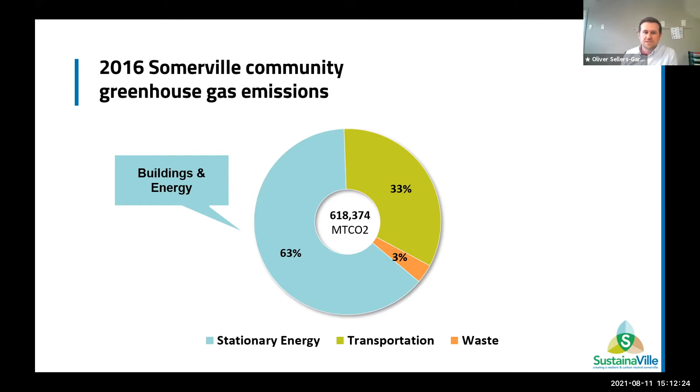Our climate action plan, Somerville Climate Forward, which we completed at the end of 2018, is a really broad-reaching plan. It covers greenhouse gas reductions, resilience, and equity. But reflecting what an important part of our carbon footprint buildings are, four of our 13 strategies are directly related to reducing that stationary energy part of the pie.

As you'll see in our plan, we really look at new construction and existing buildings quite differently, as makes sense. For a lot of this, we think the best strategy is to consider what's going on at the state level versus what we can do internal to our community. So we really prioritize working for state level changes so that new construction across the state will be net zero. The actions there were for us to play more of an advocacy role, and we've partnered and collaborated with many of the people on this call.

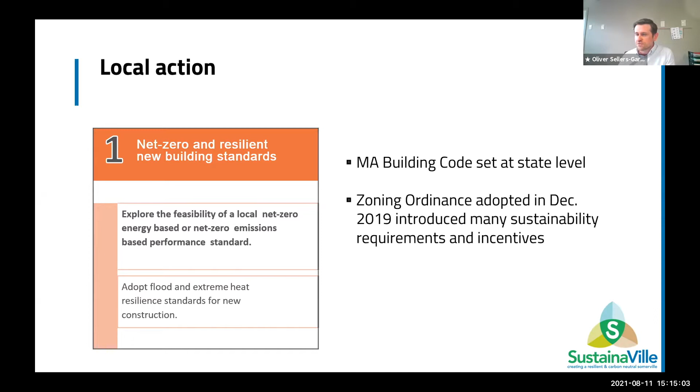On a more internal-to-our-community level, we had a goal to explore the feasibility of a net zero code, or something like a standard for our buildings, understanding that the building code is set at the state level and our hands are really tied. That work has taken a winding path and more quickly found traction in looking at what we can do within our zoning authority to do something like a standard.

I don't have to explain this to you, but I'm going to anyway—just to remind everyone that zoning is not a great tool to change everything about new construction. We really can't restrict materials or set any sort of energy standards. These are all things we're familiar with. Those of us advocating for action at the state level are kind of left with the Swiss cheese of all the big things that might really matter.

So, as a big oversimplification, what this means is that in zoning we're really left using incentives to get the high level of building performance we're looking for. What we're really looking at are some requirements that have not been questioned much from a legal precedent standpoint in terms of standards, but the majority of what we're able to do is with incentives, because we're not actually requiring anything that takes the place of or supersedes the building and energy codes.

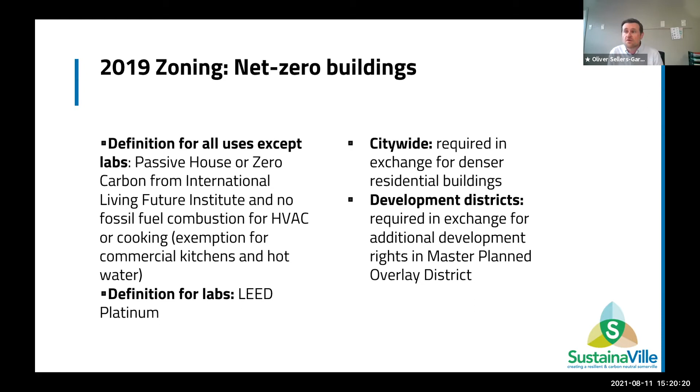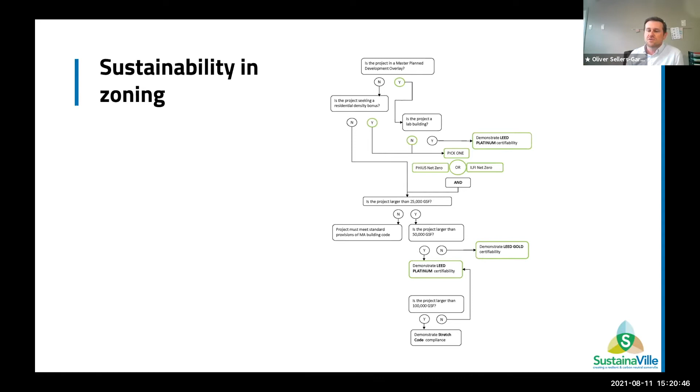This slide is hard to read. I put it in here for posterity because everyone asks, can we have a copy of the slides? I figured this is something good for you to look at when you have the copy of the slides on your desktop. This is a flow chart to understand basically where your building would fall in terms of having to meet some of these requirements or take advantage of some of the bonuses.

So to comply, there are lots of different things that you have to do, but related to the zoning I mentioned, typically what this looks like is submitting a LEED checklist and a narrative. We also have a questionnaire that we ask energy and resiliency questions about, which is both to collect information, but really to prompt thinking. And then also recently we're piloting the use of a low load building calculator that gives everyone the energy information we're actually looking for, which is to understand how your proposed building is actually performing compared to a code building or a much more high performing building.

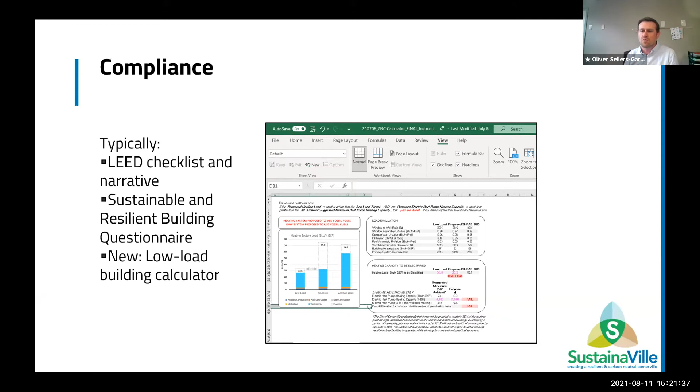So I'm just going to close here by reflecting a little bit on where this came from and where we're going now. The intention of having multiple pathways, which is really the discussion for today, is giving lots of different choices, but there are some nuances.

With Passive House, we saw an ever greater uptick in use and awareness, and really good precedents in the residential sector, particularly affordable housing. For zero carbon, we were really interested in seeing embodied carbon as part of the standard. And also we wanted to use our position to try to introduce a new standard into the region for its use.

These numbers are already a little outdated, but in the year and a half that this zoning has been in effect, we've seen close to 200 Passive House units go into the permitting pipeline. Over 20% of that is affordable housing, and that's not just because of the affordable housing minimum that's required, but also because we're seeing all affordable Passive House buildings being proposed.

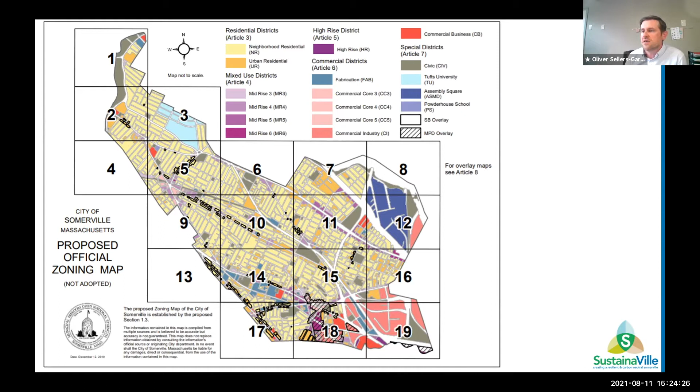I do have an extra slide that I kept in case there was a question, but now I'm realizing it might be helpful for you to see, since you all know Somerville, moving around Somerville, this will give you an idea of what is available for net zero development, and that's an enormous portion of the city. The black hashed area is where you could basically build unlimited height net zero buildings, and that really tracks well with our development areas and new transit. Residential is a large swath of the city.

So I see that some questions have popped up. I'm going to defer to Jim if you think there's any urgent ones to answer now, or if we can do it later and I can pass off to Aaron.

Let's answer these two about certifiable real quick, because I think that's easy and you probably have it. So both for LEED, it's LEED certifiable as opposed to certified.

But is that the same for the zero carbon and passive house, or are you expected to go through the certification in order to get the density bonus, which is sort of backwards because you get it first, but whatever. For LEED, it is certifiable. And I believe for passive house, which is what I'm more familiar with—we haven't seen any for zero carbon—but I think you can't really move forward without actually registering your project and essentially going for the certification. So it kind of de facto becomes that you do become certified.

Yeah, that sort of makes sense. And I can say that's been our experience working on projects in Somerville.

And then I guess Galen had a quick question about whether the density bonus is applicable only to new construction, or does it include large scale renovation? This is all new construction, and one of the reasons why zoning is such an imperfect tool is that it really only touches new construction or major renovation.

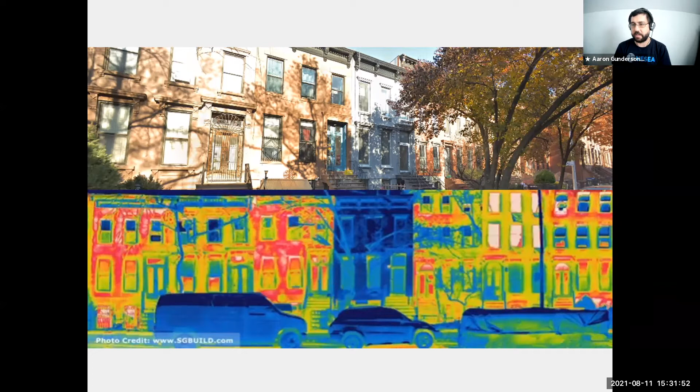And in addition to new buildings, we also see existing buildings being renovated to become passive house. So this is the image of row houses in Brooklyn, and one of those was renovated to be a passive house. Still hard to tell right now, but throw up the thermal image and it makes it a little easier to see. That one in the center that's blue, that's the renovated passive house. Basically it's throwing a blanket over it, trapping all the heat in. The buildings next to it with the red, yellow, green coloring on the thermal image, that's heat escaping. It's staying in the passive house.

What you achieve by doing this is a reduction in overall energy use, of course, but you also see a reduction in the associated carbon emissions, which is really the reason we're doing this to begin with. But beyond those big focuses, energy and carbon, we also see improvement in air quality, health of the building, and occupant comfort inside of it.

So lower instances of particulate matter and VOCs and other pollutants inside the building, better rates of ventilation, so air exchange. You also see healthier living spaces, more comfortable and consistent room temperatures. So say the room temperatures are varying from room to room, or from next to the window to next to the door, it's much more consistent. You don't have the air drafts coming in.

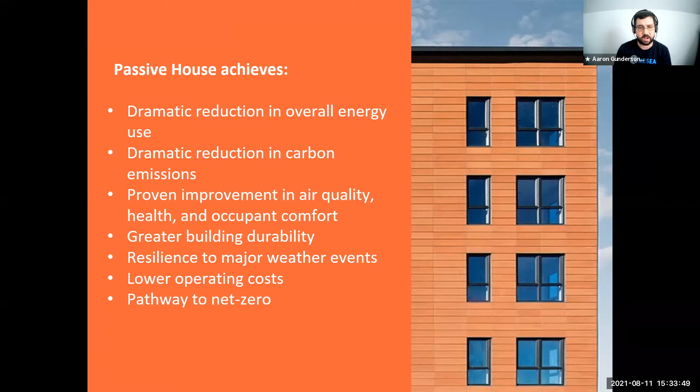We also see lower operating costs, of course, and then a pathway to net zero, which I'll talk a bit more about here in a moment. So what do I mean by energy reduction? What we achieve is a 90% or greater reduction in heating and cooling loads.

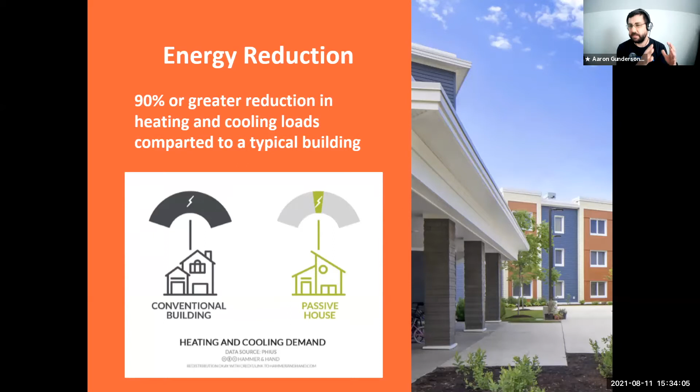And this isn't just a goal. Passive house is, as I mentioned, a performance standard, so you have to hit these numbers. So 90% or greater reduction compared to a typical building is what you can expect from passive house for space conditioning. In terms of overall energy use, it varies, but we definitely see a pretty consistent maybe 60 to 70% reduction in overall energy use from a typical project.

A graph here is just showing you a comparison of Massachusetts projects. This is EUI, or kBTUs per square foot of energy use in the building. The left bar is showing you buildings built to the Massachusetts stretch code, and the one on the far right is showing you projects built to the PHIUS Plus 2015 standards, which is one of the more common passive house standards. You can ignore the middle one for now.

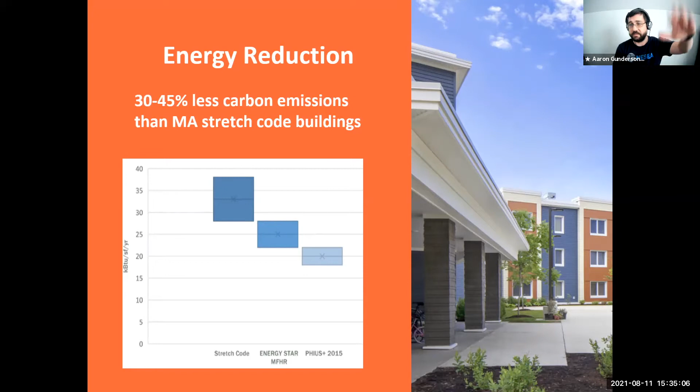But what you see is the variation. The stretch code buildings are up there around 38 EUI down to maybe 28 at the low end, whereas the PHIUS-built projects are right around 20 EUI. So a significant reduction from even stretch code buildings. If we were just looking at regular base code buildings, not the stretch code, it would be off this chart, maybe 55 or so.

So it gives you an idea of the type of energy reduction that we're seeing in these projects. As I mentioned, they're also a pathway to net zero. The passive house standard, sort of the core passive house standard, is not net zero. It doesn't require the project to be net zero. What it requires is that significant energy reduction. But because there is a significant energy reduction, many of these projects become net zero because they no longer require a large space for solar, they can now fit it on their roof.

Or in the case of the Bullitt Center here in Seattle that you're seeing, on kind of an extension of the roof. But that's one of the ways in which passive house is able to be this pathway to net zero, by reducing energy demand significantly. Hopefully you can add renewables and get it on site, or maybe on site and a small off-site somewhere else.

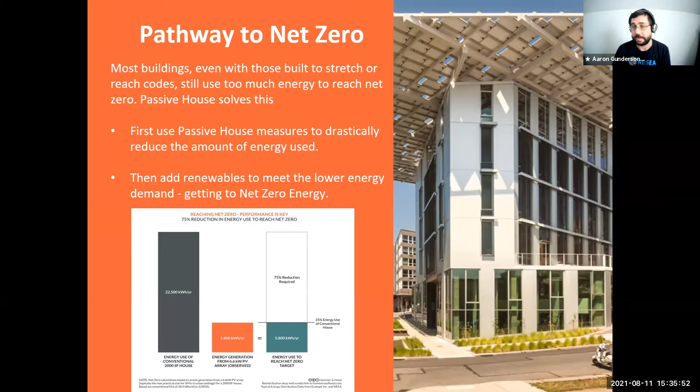Using some of the sunlight in the winter months for heat for the building, but then finding unique ways to block it out in the summer so you don't overheat the building. And then balanced ventilation and efficient mechanical systems.

Passive house buildings do have mechanical systems. They still use heating and cooling produced in the building, most commonly through air source heat pumps or efficient VRF systems in multifamily buildings. And then pretty much every project has some type of energy recovery ventilator or heat recovery ventilator. For larger projects, these are sometimes one per unit, or sometimes ducted to a group of units. That varies from project to project.

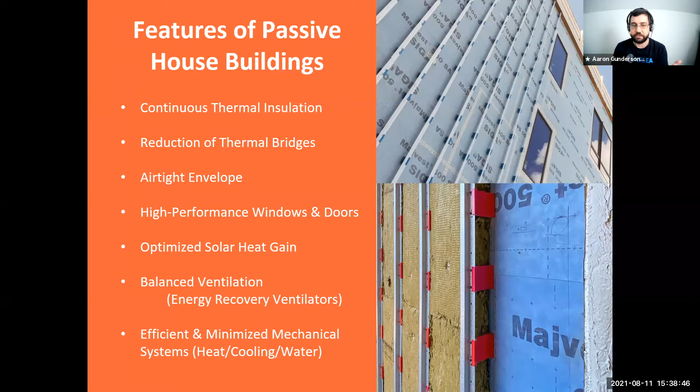So these are the type of details that become important with passive house projects and really separate them from your traditional buildings. Now, in terms of certification, what does this actually mean? What are we actually measuring? There's sort of two main categories: your performance criteria, and then your other criteria, sometimes called the soft criteria. The performance criteria are the main ones.

This is focused on the areas of heating and cooling demand—basically, how much energy is the building using for heating and how much energy is it using for cooling?

Then there's whole building air tightness. This is measured with a blower door test on site, so you're actually measuring the air tightness of the building. I'll talk a little bit about that metric in a moment.

And then the last one is your source energy demand. This is the overall energy use of the building itself, measured in source energy. So for those familiar with site energy versus source energy, we're talking about source energy—what actually has to be used at the power plant in terms of electricity.

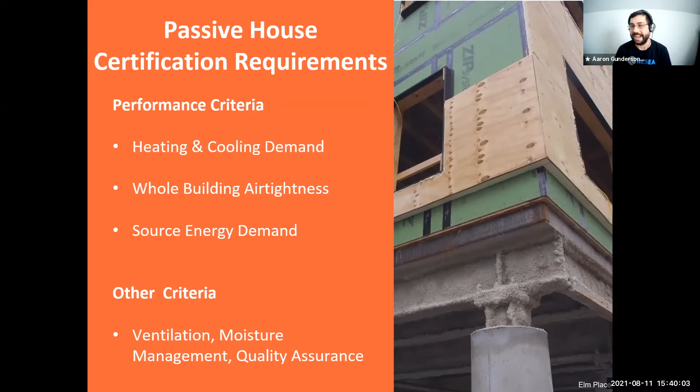Some things you're not seeing here: you're not seeing the requirement for it to be net zero, like I mentioned before. You also don't have a requirement for it to be all electric. We do see passive house buildings that become all electric, but it's not a requirement of the standard. In a lot of cases, some of these larger multifamily buildings might still have a gas line running in for water heating, for example—that's kind of a common use for that. We're starting to see the shift to electric water heaters, but it's been a slower shift than it has been to, say, electric heating systems.

There are two groups that create the Passive House standard: the Passive House Institute, or PHI, and the Passive House Institute US, or PHIUS. Both organizations exist, and both certify projects right here in Massachusetts and in the US. So don't let the names confuse you about Passive House Institute US versus non-US—they both exist and both certify projects. They create and manage the Passive House standard, defining the metrics and criteria, and provide the certification.

So when you enroll your project to become a Passive House, you pick one of these. You're not doing both - you're enrolling with either PHI or with PHIUS. You're going through their certain standard and meeting their criteria. We're not going to go into the actual criteria today, the numbers - they're very similar between them, but there are little differences. So you enroll with the specific one, and you generally work with a Passive House consultant or designer who's experienced with that specific program.

Both of them have multiple levels of certification - they have their basic level Passive House certification, and then they offer some improvements above that. PHIUS just rolled out their newest standards starting this year for 2021, which I think will become required starting next year. That includes PHIUS Core, which is what we've been talking about, the basic requirements to be a Passive House building. But they also introduced PHIUS Zero, a way to recognize projects that are becoming net zero. For the standards in Somerville and other municipalities that are putting Passive House into their zoning requirements, it's simply that core metric, that basic metric of becoming a Passive House building.

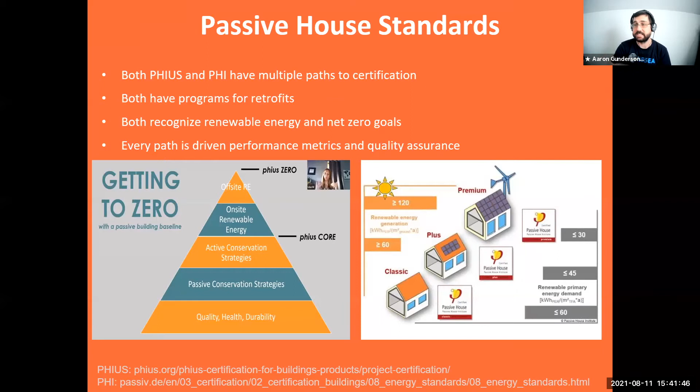So I mentioned air tightness - I want to come back to that. This is the one number I want to show because I think for most projects, especially the larger projects we're seeing, the ones that would trigger density bonuses in Somerville, air tightness becomes the most critical metric rather than the thermal performance and heating performance. Most projects through the design phase are really able to hit that through tweaking how they design the project. But the on-site construction is really where the air tightness is tested, and that's where it becomes important - all those details, making sure everything gets done right during construction, really determines if this is hit or not.

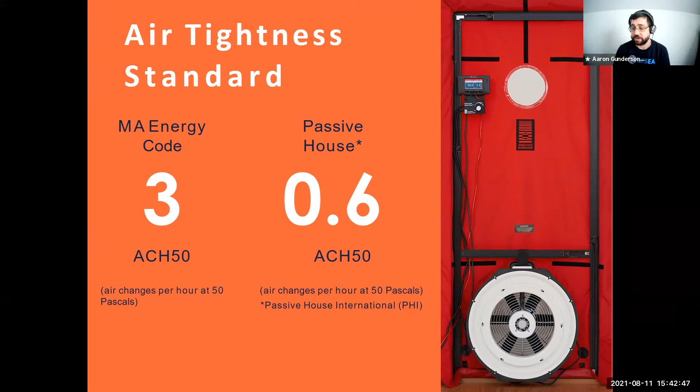So it's 0.6 air changes per hour at 50 pascals of pressure - that's just a fancy way of talking about the level of air tightness the project has to achieve. The current energy code in Massachusetts says 3, so you can see it's a pretty steep reduction, and why this is probably the big metric projects are focused on. But by doing proper detailing on site, making sure you have the quality assurance and quality control there, allows you to make sure that's successful.

So I want to talk a little bit about how Passive House fits into LEED, and I'll mention the Living Building Challenge as well. With LEED, there's a whole bunch of wide-ranging categories where you can get points. Passive House really helps you narrow in on a couple of those - obviously energy and atmosphere, which is a big part of LEED credits, Passive House really allows you to hit quite a few of those. But it can also help you hit some of the indoor environmental quality credits as well, because of that focus on ventilation and fresh air - you see some of those points being hit as well.

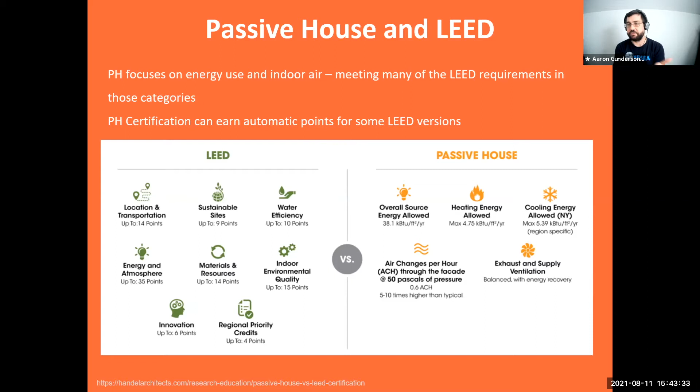So Passive House is really complementary to projects - if you're already familiar with getting a LEED Platinum building, when you look at those energy and atmosphere credits, for example, you're going to see Passive House really beat a lot of those.

The other big thing with Passive House, and where I think it's really important - I like the question that was brought up earlier - is that certification doesn't just have to be certifiable, certification is really important and it does have to be done. That's because what Passive House does is provide that third-party certification. This isn't just you as a designer, developer, or builder vouching for your project - this is actually a third party coming in and verifying that you have done the right energy modeling, that you built the project how you were supposed to build it, and testing it on site through blower door tests and other means, really making sure you hit the level of performance and quality that Passive House requires.

So, some examples. I really only have one to talk about—I mean, Somerville is why we're here today, but we've seen this happen in other places too, in different ways. On the policy front, passive house is really being addressed in a scattershot way. You're seeing different municipalities across the country, and around the world, incorporate this in different ways. A lot of cities in Europe have led the way. But like Somerville, they're trying to figure out how to address their own carbon emissions. Just like that graph Oliver showed, where they noticed buildings were a huge source of carbon emissions in Somerville, other cities are noticing the same thing and turning to passive house as a method to address that.

Vancouver was one of the first larger scale cities to do this, and they set aside zoning requirements that included specific low emission targets. They outlined both Passive House and ILFI, the Living Future Institute, as a way to meet that. This plan, the zero emissions plan, requires all new buildings to meet this by 2030, with some requirements for certain buildings by 2025. They also offer space bonuses for affordable projects. One unique thing they did, and what I'd like to see other cities with similar zoning requirements do, is train city building inspectors. The folks actually going out inspecting these projects were trained as certified Passive House tradespersons, one of the certifications offered through PHI or Phius. This is essential so everyone's speaking the same language and able to inspect these details on site.

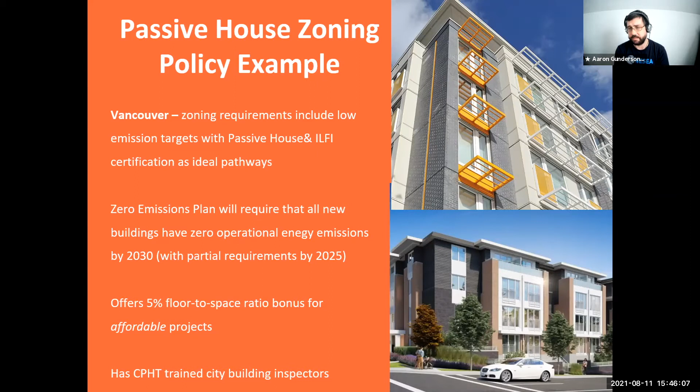These are two projects here. Both are fairly large passive house developments. The one on top, I believe, is the all-affordable one. So we're seeing a mix of affordable units and market rate units doing this.

Here in Massachusetts, we have a lot of progress on policy. Somerville, of course, at the municipal level. At the state level, there's an ongoing debate around the net zero code, which passive house is wrapped up in—we'll see what comes out of that. But a lot of municipalities are addressing this, so Somerville is not alone. Cambridge is addressing it in various ways. We've also seen Newton incorporate passive house into their own zoning ordinance, requiring passive house or living building certification for certain large projects that trigger their special permitting process.

The other way is through affordable housing. The DHCD has included passive house as a way to incentivize projects to achieve it in order to get affordable housing funds. They do this through their exemplary energy performance category, where passive house projects get 5 bonus points. So if you're applying for funding and proposing your project will be a passive house building, you get those extra points, which goes a long way toward achieving those funds. Pennsylvania was actually the first state to incentivize passive house this way, and it was very successful—in the first couple of years, 20 to 30 different projects went through achieving funds. The cost comparison showed those passive house projects were on par with the non-passive house projects approved. Incredible performance. We're really hoping Massachusetts echoes this.

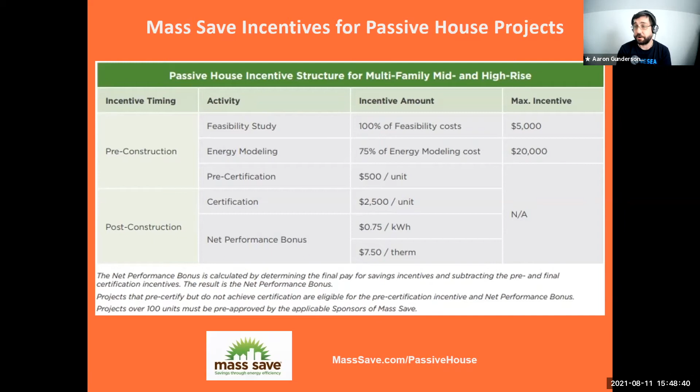So that's the end of my presentation. As I said, I didn't have a lot of details. What I'm going to rely on are questions from you guys for me to keep talking.

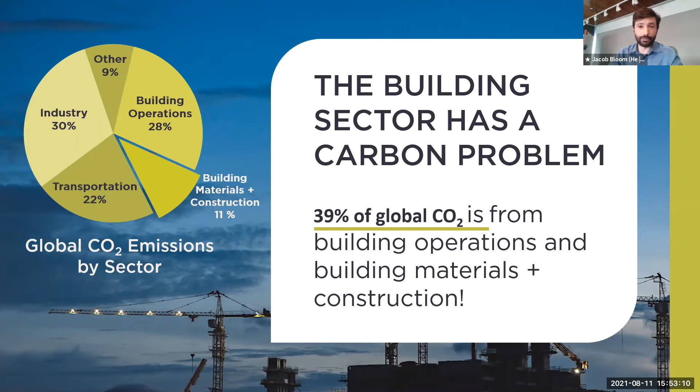Over the next 2 decades, it's expected that about 50% of greenhouse gas emissions from new construction is going to be in the form of embodied carbon from building products and construction, and only 50% from operational energy. The Zero Carbon certification looks at both of these things and tries to tackle both, and that's, I think, what really sets it apart from some of the other certifications out there right now.

On the one hand, we've got the operational energy that's coming from your electrical plants. And then you've also got the embodied carbon, the greenhouse gas emissions that come from the making of building products, transporting them to the site, and erecting them. So we'll talk about each of those and how the Zero Carbon certification addresses them. Essentially, the goal of the certification is first to reduce each of those and then to offset the rest.

To first look at operational carbon, the first step is to eliminate all on-site combustion. There are exceptions to this, so if anyone is thinking they can't do this certification because they need combustion for something, there are exceptions I'll talk about later. But as a whole, we want to eliminate all natural gas and burning of fossil fuels or any fuels on site.

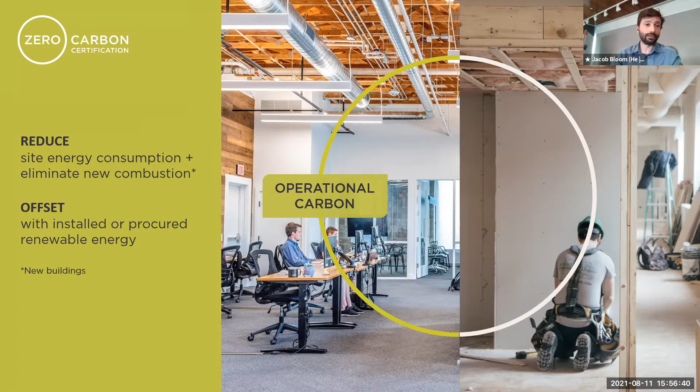The other side of this is the embodied carbon. This is one that until pretty recently has been harder to wrap our heads around because we didn't have good numbers for it. But more and more, we're seeing environmental product declarations that are declaring how much embodied carbon is coming from these building products that are going into the building.

So the first step in the embodied carbon certification side is to do a life cycle analysis of what the embodied carbon of the building is. This includes all major components of the building - structure, envelope, foundations, interior finishes, that sort of thing. It doesn't account for any furniture or anything like that.

Once you have that baseline, you have to find a way to reduce it by a minimum of 10%. And then at the end of construction, whatever's left beyond that 10%, you would purchase in the form of carbon offsets to get you down to net zero carbon emissions.

And that's really the big picture of the whole certification, right? First, for operational energy, you reduce by at least 25%, hopefully more than that, but at least 25%. And then you put in renewables to offset the rest. And then for embodied carbon, you run the analysis to see what your embodied carbon is, reduce it by a minimum of 10%, and then purchase carbon offsets to offset the rest.

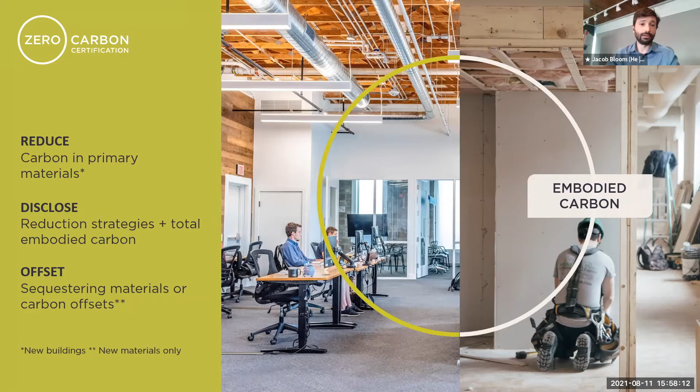So, you know, for every development, the question is what is the value of doing this? Why would we do this? Obviously here today we're talking about Somerville, and a great reason to do this is the zoning incentives that Oliver laid out. But there are other values as well.

Similar to Passive House, this is a performance-based certification. So after construction, once the building is occupied for 12 months, ILFI will review the energy use of the building and ensure that the energy being generated from the renewables is offsetting 100% of the energy use of the building.

Another one is for industry recognition, and this is one that's really becoming a pretty big deal.

And we're seeing a lot of major companies that are doing this really to market their brand and their reputation, right? We're seeing companies like Microsoft and Google and Salesforce who have said that they're going to meet these targets, and I'll come back to that in a minute.

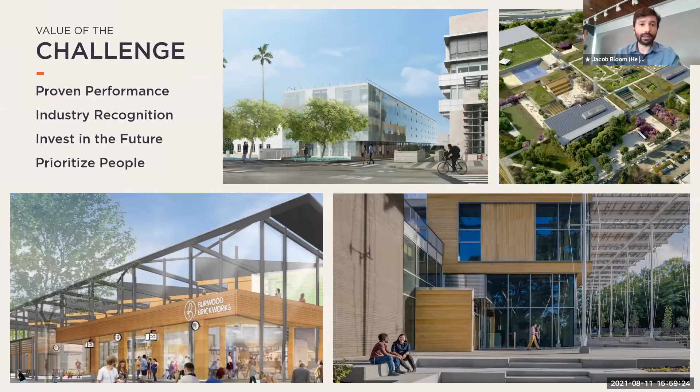And then there's the financial side of things, and this is the Bullitt Center that Aaron showed as well. It is a fully living certified building, but they recognize that when you're building a building, there's a lot of financial analysis involved, and it's got to make financial sense. This is something that really can work, and the numbers are there to prove it.

Salesforce has said that they're going to have all of their office fit outs zero carbon certified by 2030. We've also seen this from Google, and Microsoft has gone past this and said that by 2050, they're going to have offset their entire historical carbon footprint.

And while I'm sure all these companies are doing it because they have good morals and it's the right thing to do, it's also very much a business move that this is building their brand, and this is what consumers are starting to look for. So to look at a couple case studies for zero carbon certification and what this looks like.

This is Google's new offices in London. It is a zero carbon certified building. And this really shows that scale is no limit for this certification. A lot of times when we talk about net zero and then we start to talk about high rises or really large buildings, people get afraid of how they're going to hit net zero. And the zero carbon certification really does that by allowing you to offset with renewables offsite.

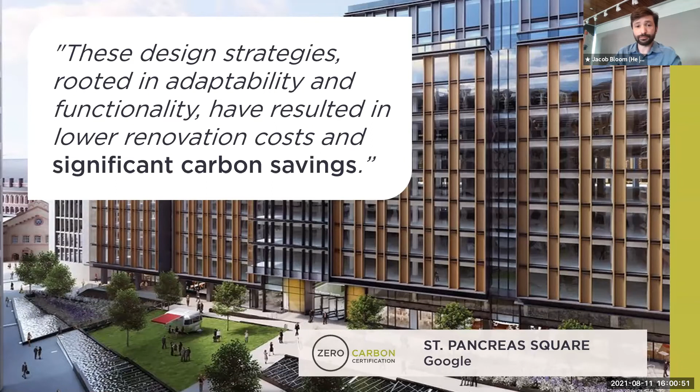So just to touch on a few of the common exceptions for the zero carbon certification, from a natural gas standpoint or an on-site combustion standpoint, there's an exception for commercial kitchens. It is not just a blanket exception. Anyone seeking this exception needs to document why there is not an electric alternative to what they're trying to do. But if a developer can come forward and show that they're building a commercial kitchen and that there is not a feasible electric alternative for a certain cooking process, they could get an exception to still allow combustion for that process.

There's a similar exception, I don't have a slide for it, but for lab buildings, and while Somerville has other requirements for lab buildings, for things like Bunsen burners and lab experiments that require really high source of heat at a specific point, there's exceptions for that as well.